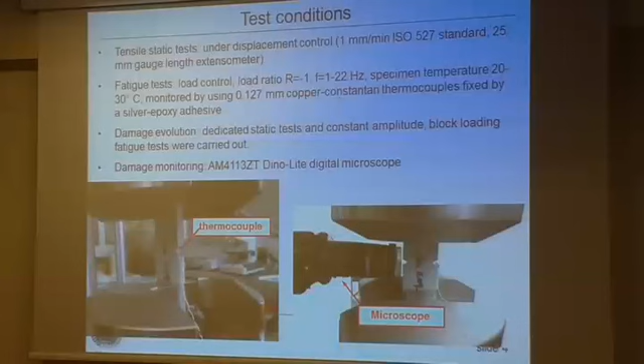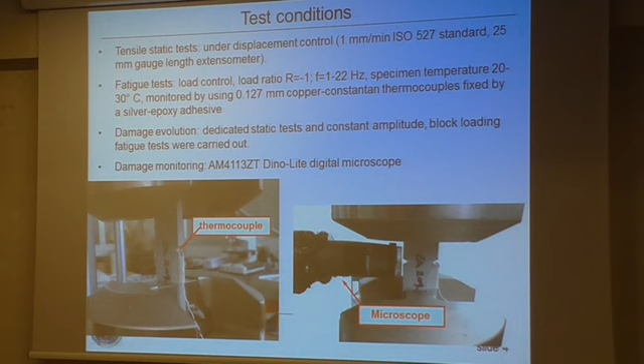Standards, fatigue tests were carried out under load control by imposing a sinusoidal waveform with a load ratio equal to -1. Test frequencies ranged from 1 to 22 Hz, depending on the applied stress level, in order to maintain the material temperature below 30 Celsius degrees. Temperature was measured by gluing a thermocouple at the notch tip.

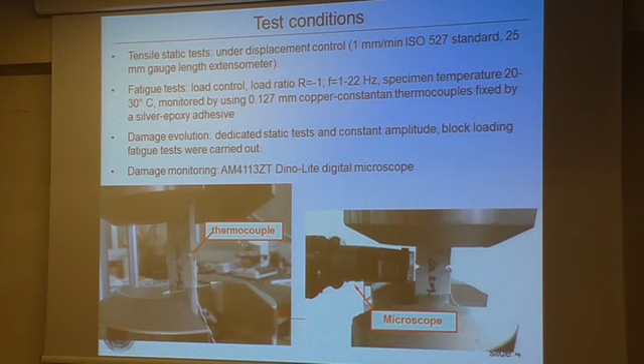For the damage evolution, dedicated static and fatigue tests were carried out, and the damage was monitored using a digital microscope. Here is an example of characteristic stress-strain curves obtained in the case of the material, and we can see that the elastic modulus was reduced by about 20% using completely recycled polypropylene with respect to the compounds made by virgin material. A similar decrease was found in the case of yield strength.

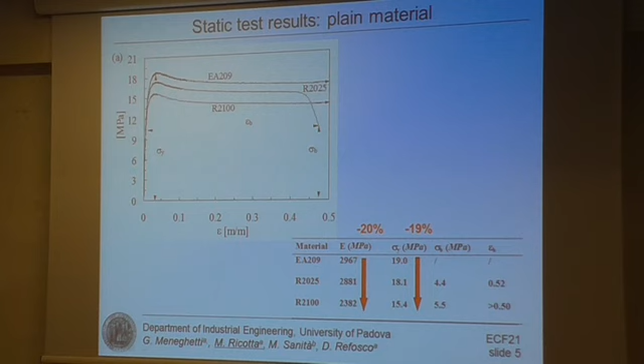This was found by comparing the yield strength measured in the case of fully recycled polypropylene with respect to the virgin material. The results of static tests carried out on notched specimens are summarized in this table.

Keeping in mind that the ratio between the theoretical stress concentration factor evaluated in the case of sharp notch with respect to that evaluated in the case of blunt notch is equal to 3.6, we can see here that for the compound made by virgin polypropylene, the ratio between the yield strength evaluated for blunt notch with respect to sharp notch is equal to 1.0.

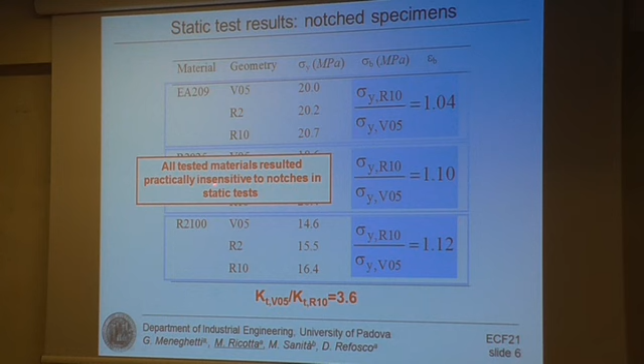Similarly, in the case of partially recycled polypropylene, we can see that the same ratio is equal to 1.1. Finally, also in the case of totally recycled polypropylene, we can see that the same ratio is equal to 1.12. Therefore, at least from an engineering point of view, we can conclude that all tested materials resulted practically insensitive to notches under static loads.

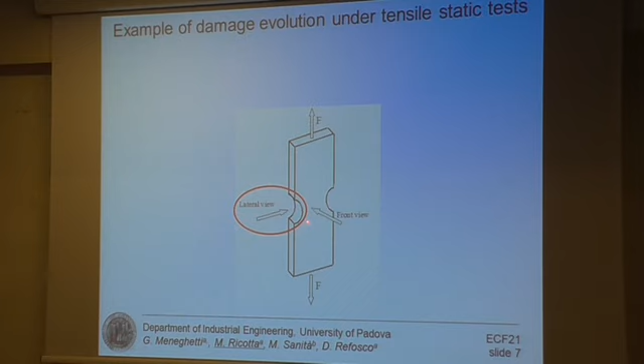Here is an example of damage evolution. We monitored the damage evolution from two different positions: a lateral view in order to see what happens inside the notch, and a front view in order to see what happens in the net section. Here we can see an example obtained in the case of totally recycled polypropylene with notch root radius equal to 10 millimeters.

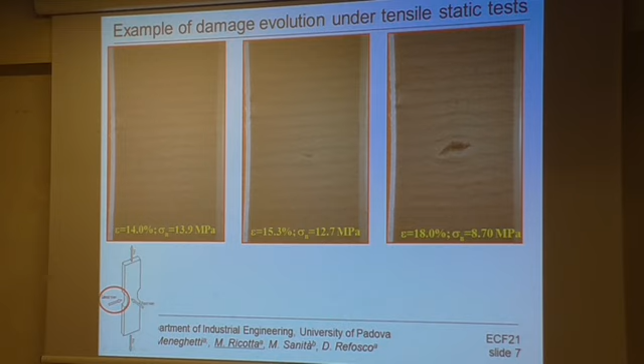Here we are seeing the specimen from the lateral view, so we are looking inside the notch. We can see that damage evolution starts with several voids that grow, and some of them coalesce to form a single void that becomes very large at the end of the static test. Here we can see that light is coming from the opposite side because the void is completely developed across the width of the specimen.

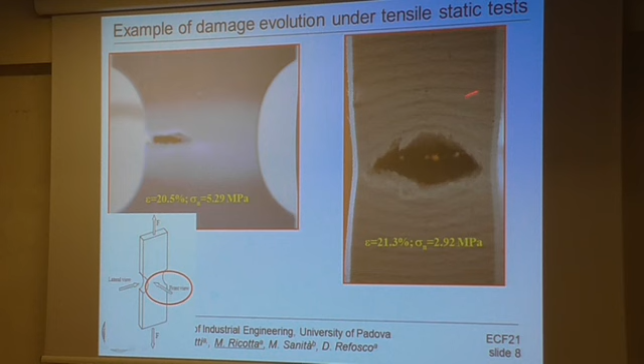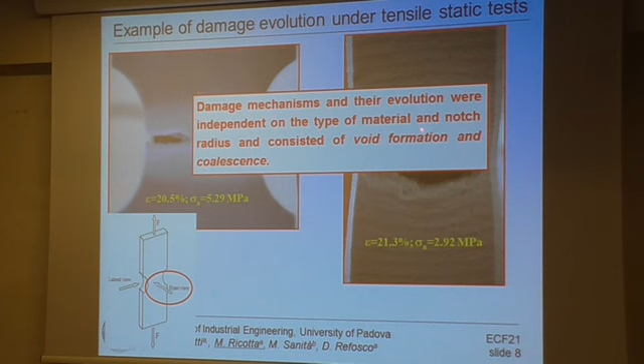Otherwise, if we observe the specimen from the front view, we can see that the final crack has not completely propagated yet in the net section. We performed this type of analysis for all the materials and all notch radii, and we can conclude that the damage mechanism and its evolution were independent of the type of material and notch radius. They consisted of void formation and coalescence.

Now I'm moving from static tests to fatigue test results. Here we can see the fatigue test results obtained in the case of the compound made by virgin polypropylene. All the fatigue data can be summarized in a single scatter band in terms of stress amplitude referred to the net section, despite the different notch severity. Therefore, we can conclude that the material is notch insensitive, with a reference fatigue strength evaluated at 2 million cycles and 50% survival probability equal to 10.5 megapascals, and an inverse slope of the fatigue curve equal to 12.

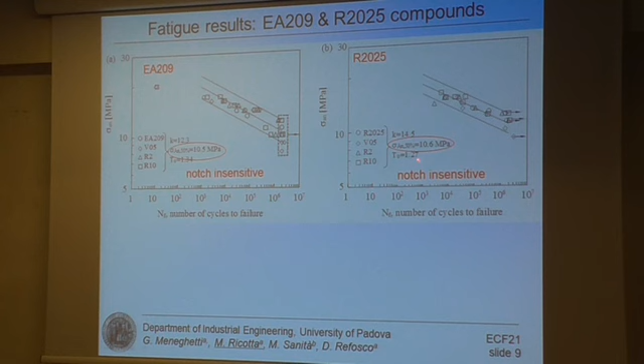Similar results were found in the case of partially recycled polypropylene. We can see that also in this case all the fatigue data can be collected together in a single scatter band. Therefore, these compounds can also be considered notch insensitive, with a fatigue strength evaluated at 2 million cycles equal to 10.6 megapascals and an inverse slope equal to about 14.

Therefore, we decided to analyze both compounds as a single population from a statistical point of view, and we found a single scatter band having a reference fatigue strength evaluated at 2 million cycles equal to 10.5 megapascals and 50% survival probability.

We can see here that in the low cycle fatigue zone, the fatigue strength of the material is practically equal to the yield strength of the material.

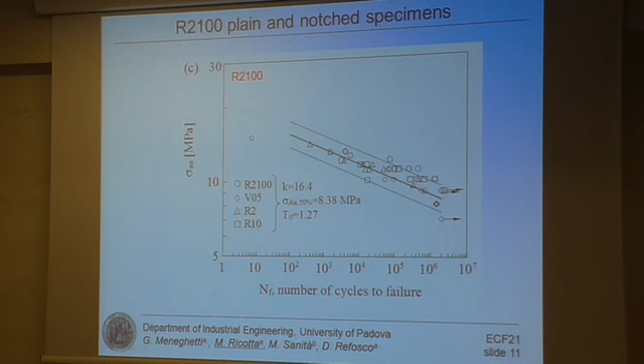In the case of totally recycled compound, we can see that also in this case we can draw a single scatter band in terms of applied stress amplitude referred to the net section. Therefore, this compound can also be considered notch insensitive, but with a different and lower fatigue strength, having a 50% survival probability, referred at 2 million cycles, equal to 8.4 megapascal, and a different slope of the fatigue curve.

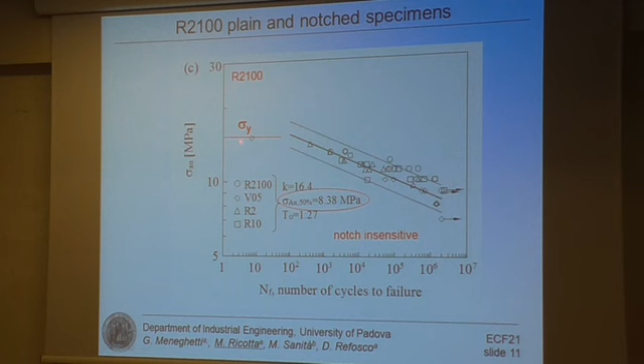The low cycle fatigue zone is characterized by a fatigue strength that is practically equal to the yield strength of the material. Therefore, we propose two different fatigue design curves.

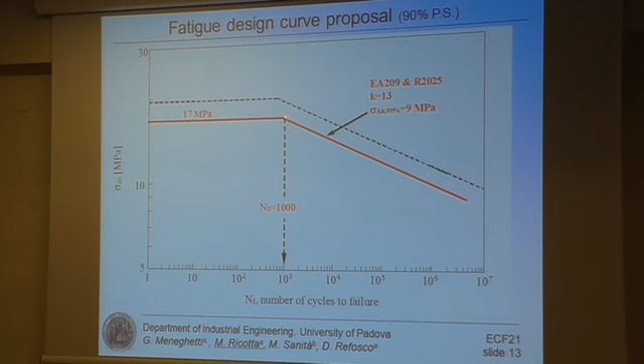Here I will show you the fatigue curves at 50% probable survivability for both these compounds that I showed you before. Then we calculated the fatigue curve at 90% survival probability, having a fatigue strength calculated at 2 million cycles equal to 9 megapascal, and we cut the low cycle fatigue zone with the fatigue strength evaluated at 1000 cycles.

Similarly, in the case of totally recycled polypropylene, this is the 90% survival probability fatigue curve that was downgraded, also calculated with the aim of obtaining the reference fatigue strength at 90% survival probability and 2 million cycles, equal to 7 megapascal. Then we cut the low cycle fatigue zone with a reference fatigue strength evaluated at 100 cycles, equal to 13 megapascal.

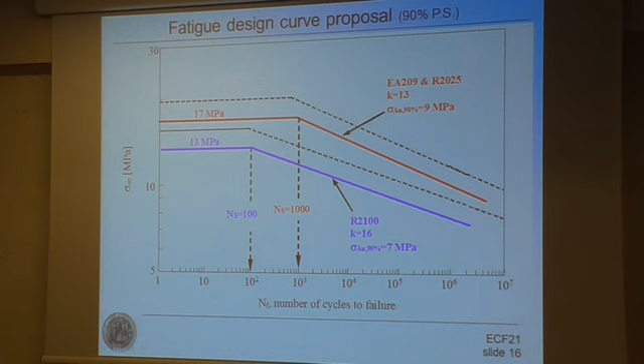Therefore, two different fatigue curves were proposed: one for compound made by virgin polypropylene, the same curve applying for partially recycled polypropylene, but a different fatigue curve that is downgraded with respect to the red one for totally recycled polypropylene.

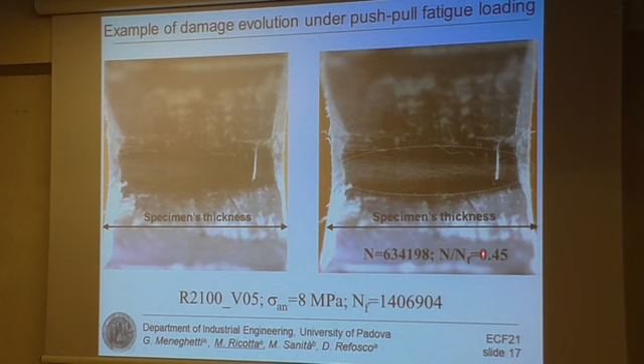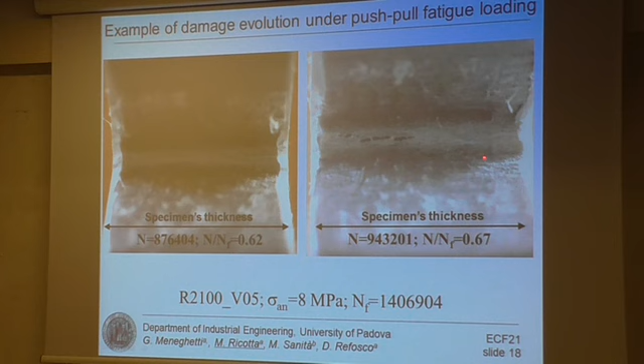This whitening grows in the thickness direction. This picture is taken at 62% of fatigue life, and here at 67% of total fatigue life we see the formation of elongated voids in the thickness direction that propagate further at 80% of total fatigue life. Here we can see practically a single big void completely developed in the thickness direction at 96% of the total fatigue life.

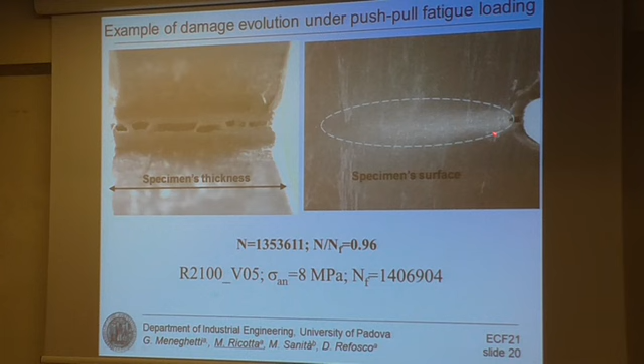But if we observe the specimen from the surface, we can see only material whitening without any cracks appearing on the specimen surface.

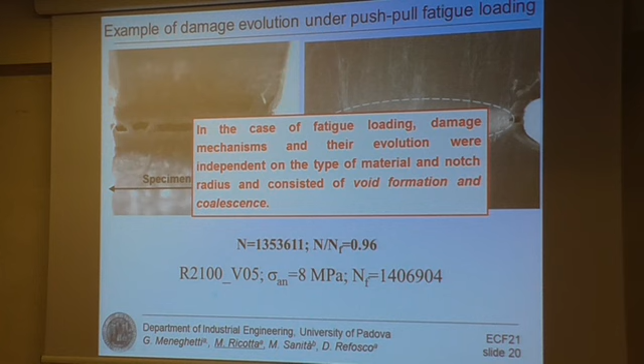This type of analysis was carried out for all the compounds and notch geometries investigated in this paper, and we can conclude that in the case of fatigue loading, the damage mechanisms and their evolution were independent of the type of material and notch radius. As in the case of static load, this mechanism consisted of void formation and coalescence.

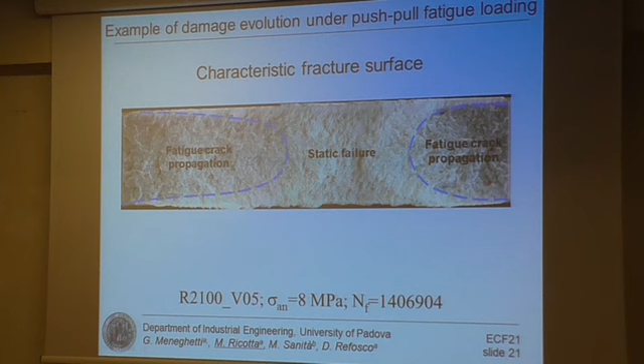Just an example of a characteristic fracture surface, from the same specimens. We can see here the gray zone where the crack propagated from both notches, and the white zone where the static failure happened at the end of the fatigue test.

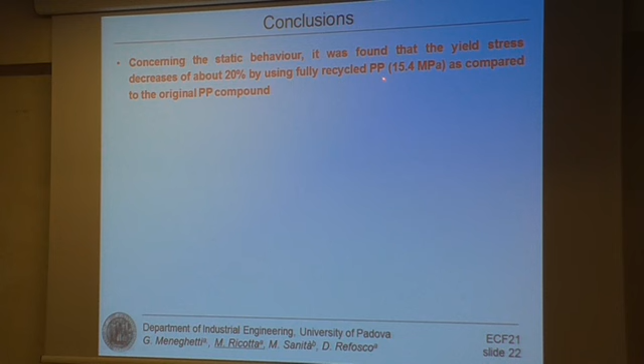Therefore, to conclude: concerning the static behavior, it was found that the strength decreases by about 20% when using fully recycled polypropylene compound with respect to the original polypropylene compound. All tested materials resulted practically insensitive to notching in static tests.

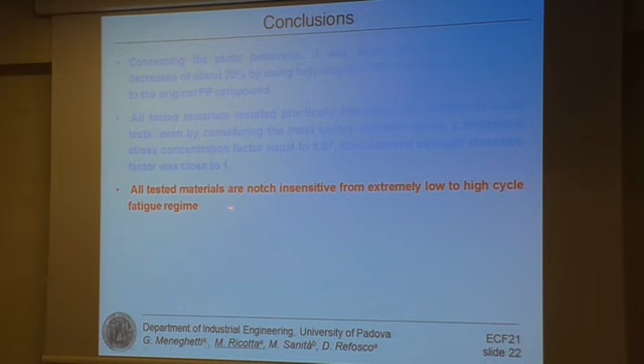These results were also confirmed in the case of fatigue load, from low cycle to high cycle fatigue regime.

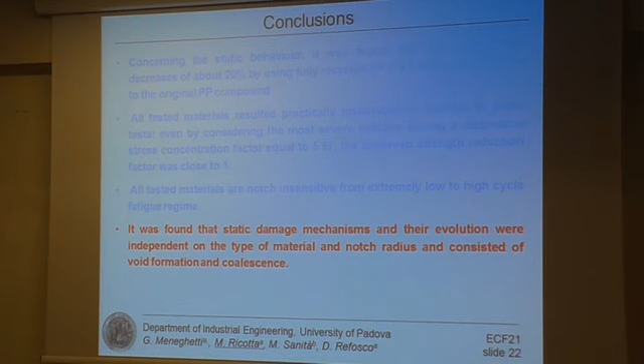Finally, it was found that the static damage mechanism and its evolution were independent of the type of material and notch radius. They consisted of void formation and coalescence, and the same mechanisms were observed also in the case of fatigue behavior.